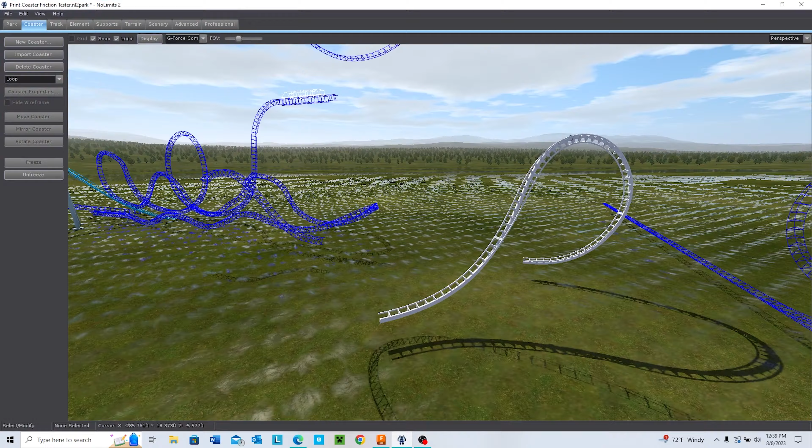Today I'm going to be showing you guys how to export a No Limits track, put it into Fusion 360, and then model track pieces to be 3D printed.

Alright, so going right into it, I have this little dive loop, or Immelmann, model built on No Limits right now. First thing I'm going to do is unfreeze it, just to show off a little shaping and everything.

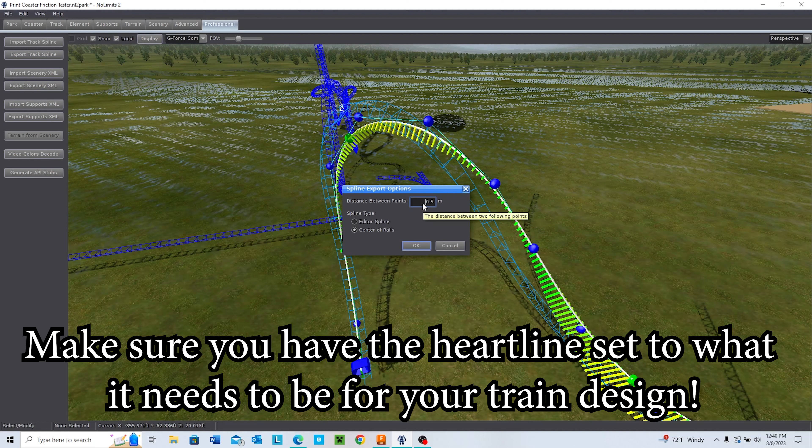Next I'm going to hit Export Track Spline. I like to export my track spline as a center of rails because it's easier to model track this way, and it looks better whenever you put it in Fusion 360. It comes in as 3 different lines, and that's exactly what the track will look like and where the spline, rails, and everything will be. So I like doing it this way.

For the distance between points, I like to do 0.5 meters. This is to model track that is 1/30th scale with a 3-foot distance between the 2 rails. This is just the scale I've chosen to model all my stuff in. Alright, so hit OK.

Then you're going to want to choose where to put your track spline. Make a new folder, just call it YouTube video. And then let's name it - we'll call it Immelmann, or how about dive loop. I don't know if I'll get the spelling right. Hit save, okay, and it should be exported.

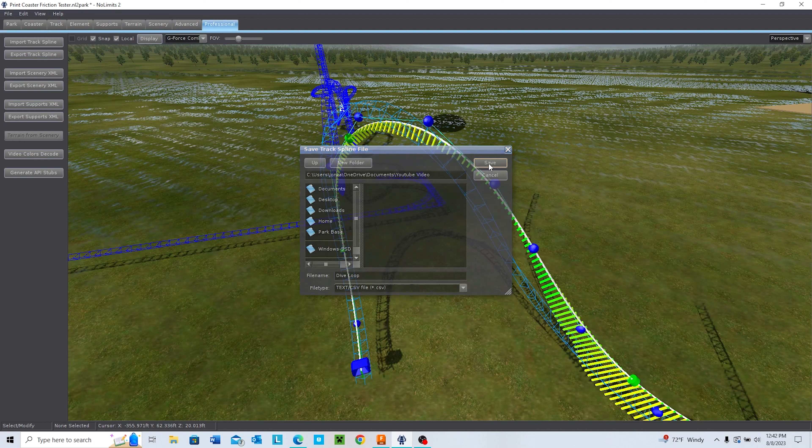The next thing I'm going to do is actually open up the track spline and slice it in a spline track extractor program. I'm going to link this program in the description, but I found it on a Discord - some guy just made it because he was sick of trying to manually do the inputs in Excel.

So pretty much what I just did is I exported a bunch of XYZ points for a single spline that's in the center of the rails. What this program is going to do is help me slice it and give me the rails on either side, along with some other stuff that'll help me model it easier.

So I'm going to open this up, and then we're going to select an input path - find that track export we just did. It goes in YouTube video. There it is, sorry, I was thinking it was in alphabetical order. Then we're going to select an output path and put that in the YouTube video again.

Let's see, where is that? And I'll call this Spline Exports.

Okay, so now we have our input and output folder path set. Next we're going to select the splines to extract. So I want a center, a left rail, a right rail, and then a bottom here. On top of that, we need to adjust the distances to center - this is how far from that center line each rail is going to be.

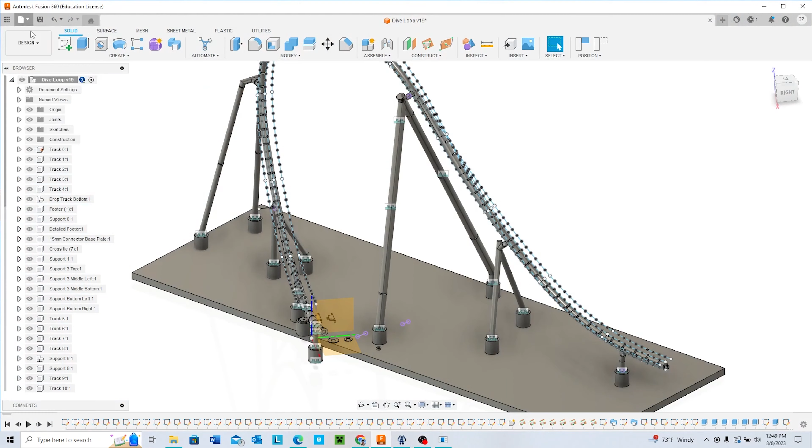So now we're ready to put them into Fusion 360. Here we are at Fusion 360. I'm going to create a new file. First thing I'm going to do is create a new component, and we'll just call it track 0.

Hit OK. We're going to go to Utilities, Add-ins, and then Import Spline CSV. So we're going to go find where we exported all those track pieces, and it will be in YouTube video, Spline exports, here we all are.

So I'm going to import track 0, bottom, center, left, right. Alright, where are they? There they are, so here it is. Here's our Spline exports. And now one thing you might notice is, remember how I said it needs to be

1.2 inches? That's right around 30.48 millimeters. Right now my document setting is in millimeters, and if you measure, it's only 9.144, which is way too small.

However, to fix this, I found the easiest way is if you select all of them, then go to Modify, Scale. Now let's select the origin. Where's the origin? There's the origin. And then we'll multiply it by 3.33333, and that should give us the perfect result we need.

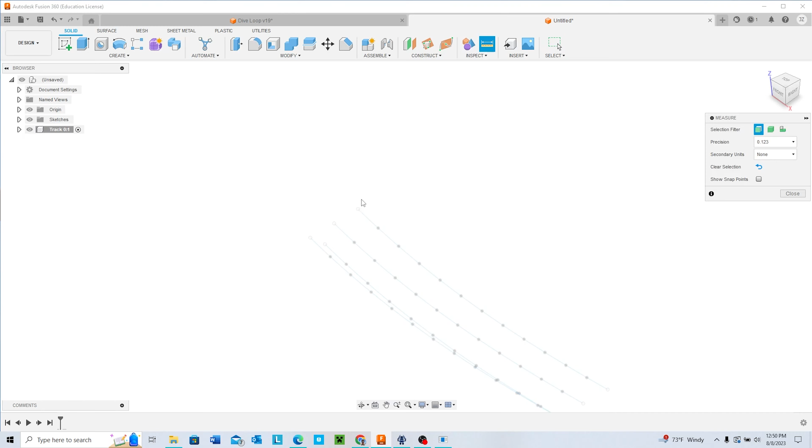So let's double check it now. 15.24, and then like I said, 30.48 is what we're looking for. And there we go, 30.48, exact distance we need. So these are our rails for the coaster, and our spline is down there.

So as you might have figured out, this isn't exactly simple, it's a strange method because you have to scale it twice. You have to scale it once in Fusion, and like I said, the numbers I'm plugging in here seem to be almost random.

Pretty much how I figured out this 4.572 number was I did a ton of trial and error, just measuring the distance between here after I'd scale it, to get that 30.48 distance I was looking for. It was just a ton of trial and error, and eventually I came across this 4.572 number being perfect. Now, if I'm being honest, I can't quite remember - I did this months ago, figured out this number, wrote it down, and was done with it. I kind of forget how I came to this conclusion, other than through a trial and error process.

I forget exactly how this program reads it. I know it has something to do with the way Fusion reads the points when you import them in. I think they read them as centimeters - I could be wrong. I'll put it up on the screen after editing this video to figure out exactly how it's reading them. But this is great if you want to make a 1/30th scale coaster with a 3-foot distance between the two center rails.

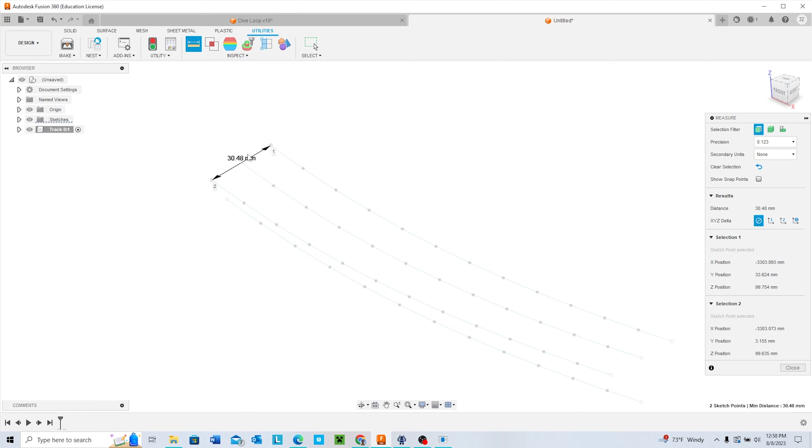Now, if you want to do something different, like a 1/48th scale with a different distance between rails, you'll have to do your own trial and error process with this program. But I will show you guys a way to verify that these splines are actually accurate to the NoLimits data at the end of this video. All right, so anyways, moving on, I'm going to go off camera and export all these track splines so we can have the full loop to model off of.

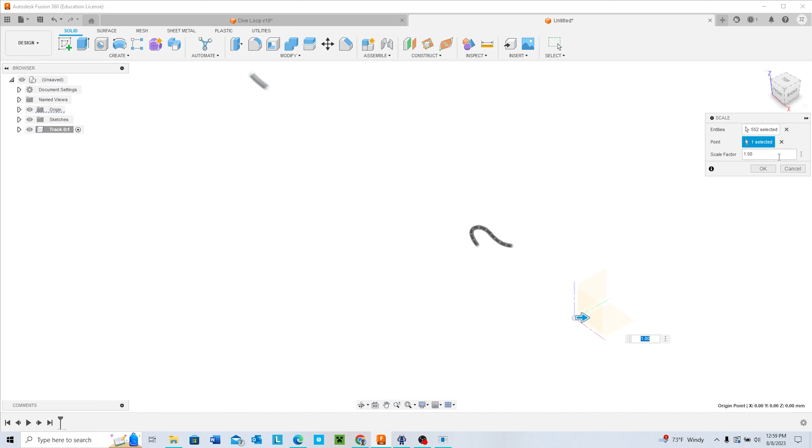Okay, I exported them all in. Now the last thing I have to do is scale them by 3.33333. So let's hit scale, select the origin point. If you select the same origin point for all of them, they'll scale exactly and perfectly. So 3.33333, doesn't quite matter how. And there we go, now we have a nice little dive loop.

Alright, so I'm going to move all these points over towards the origin, or else every time you start a sketch, it'll shoot you back over here, which is not where you want to be, so it can be very annoying. So that looks about right. Now I'm going to hide this origin.

Okay, so now I'm going to show you guys how to create a track piece. And it's pretty simple, because all you want to do is just model the spline and add indents to then insert cross ties into, because if you're 3D printing, it makes the most sense to do it similar to like a Coaster Dynamics roller coaster, where the spline, cross ties and the rails are all separate pieces, so you can get a better degree of accuracy, but also show a method if you just want to 3D print everything as one.

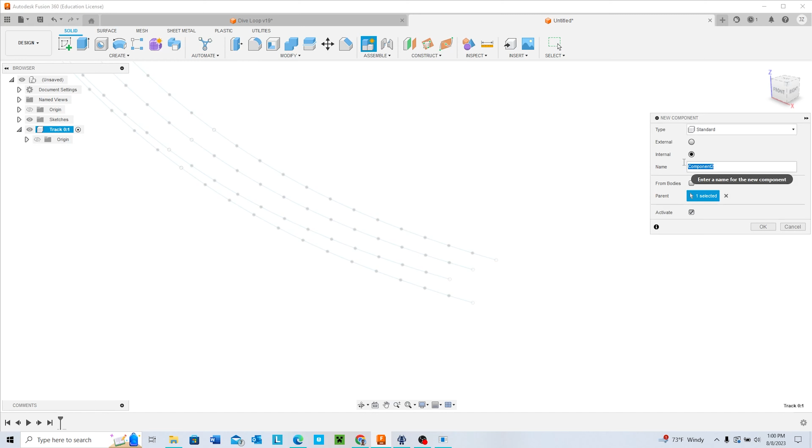So to start, let's create another component within the track itself, and we'll call this just the spline. So there we go, and now we're going to make 3-point planes on all these different points where we want a cross tie to be, and also at the either end of the track. So plane through 3 points, and I'm just going to click on all these points here. So as I said, we'll add in a cross tie position at every 2 using these planes.

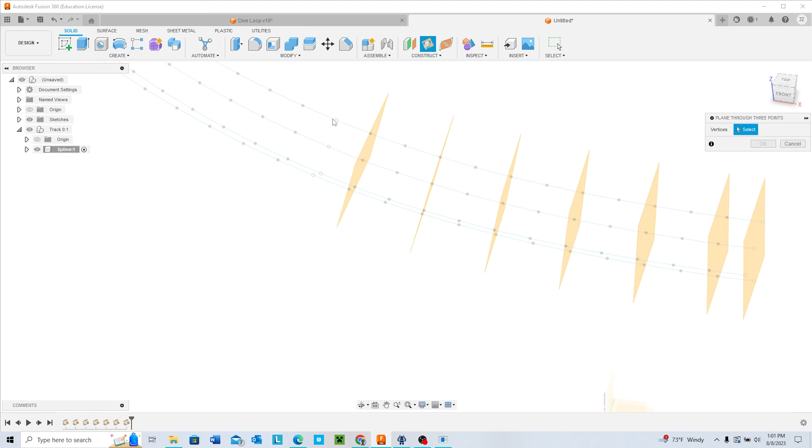Okay. And like I said, one at the end here. Okay, so there we go, we have these planes set up.

So next what we're going to do is we're actually going to create the spline that will be swept. So first thing I'm going to do is I'm going to draw a line, just a random line, and then we'll use these constraints to make sure they're right on the track pieces.

So I'm going to select this one here. Oh, that's great. Let's go back, let's try this again to make sure it's the point, and then we'll have 1 point here, and then right there again.

Perfect. The next thing we're going to do is we're going to drop down where we want the spline position to be. This can be anywhere. I'm used to modeling Vekoma style track, but I'll model B&M to change it up. So let's go 8 millimeters right here.

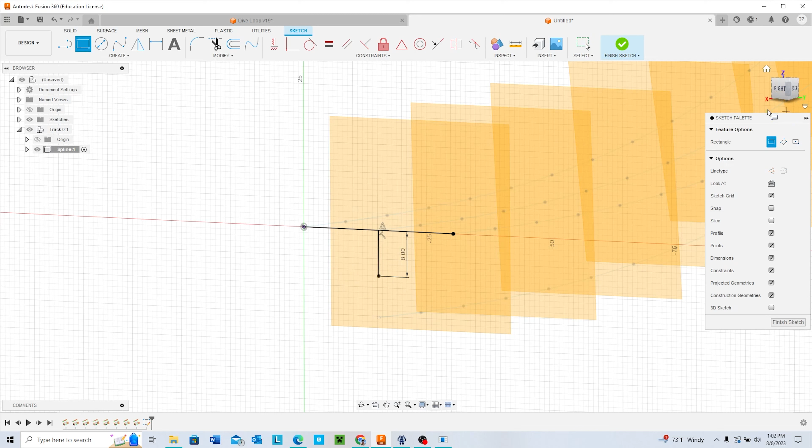And then since they do rectangular stuff, we'll add a rectangle. Let's do, how about 10 by 8? And the last thing is this is vertical. You can't have it vertical because it's not going to be in line with the start here.

So delete that, and then add a constraint. You hold control, you can select 2 different lines at once, and then we'll make a parallel constraint right here. There we go, that's fully defined.

So what I'm going to do is before I finish the sketch, just copy it. It'll make a lot more sense later down. So Control C that bad boy, finish sketch.

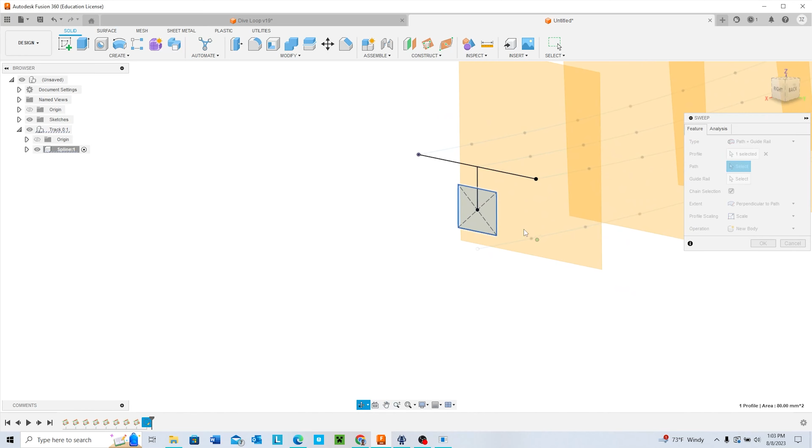Okay, so next we are going to do a sweep. So add this sweep function, and make sure you do path plus guide rail. If you do a single path, it's not going to follow the rails perfectly. So path plus guide rail, here's a profile, make it follow this path down here, and we'll have a guide rail up here. And there we go, there's our sweep.

Now you might think, set it to 1.0, and we'll just be done with it. But you actually don't want to do that, because see how at the end of the plane, this surface isn't parallel with the plane. That can cause issues when you actually attach your track splines together, where they'll be slightly misaligned. I don't think it'll be anything crazy, because this is such a small distance, but if you ever want to do an FEA or something on your model, it'll cause issues.

So what I like to do is have 2 splines, instead of doing 1.0, do 0.51, so right slightly over half.

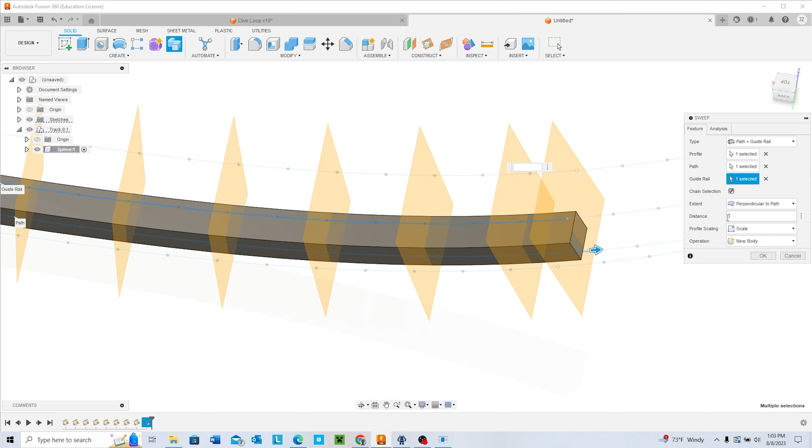And then what I like to do is add another spline on the other side to ensure that each track piece, the faces of each track, will be perfectly parallel with each other. So if you notice, the two lines went away, we need to get those back. We'll open up the sketches and find the ones that disappeared. There we go.

And now we're on this side. Remember how I copied and pasted it? That's why. So let's just put that there. Okay, and then this should be, yeah, none of that's defined, so we should be all right. So select that with this coincident constraint, select where you want it, right there, and then just double check, make sure we're clicking the right thing. Oop, not the line, the point. All right, there we go.

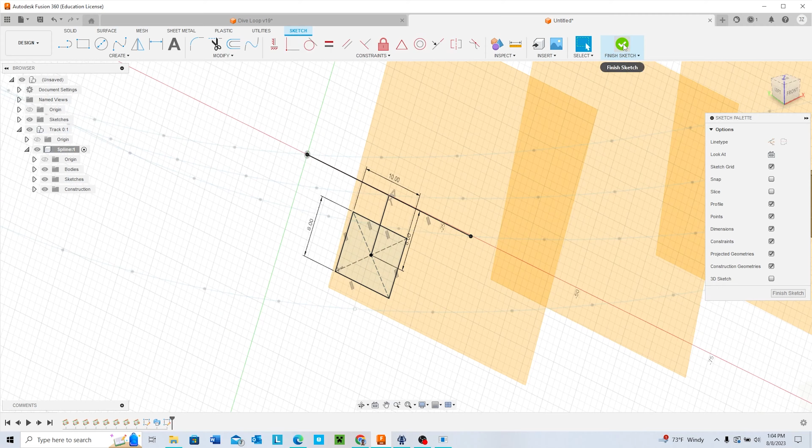Hit finish sketch. Now what we're going to do is sweep it the other way. Bottom as path and guide rail as the top.

Oh, perfect. So sometimes you get this stupid error that says the profile cannot be intersected with the rail. Try changing the profile or rail. I don't know why it does this. I think it's something because it worked fine whenever you did it on the other spline, but sometimes it just doesn't want to work the other way. So sometimes you just adjust the distance and it'll work, but nope.

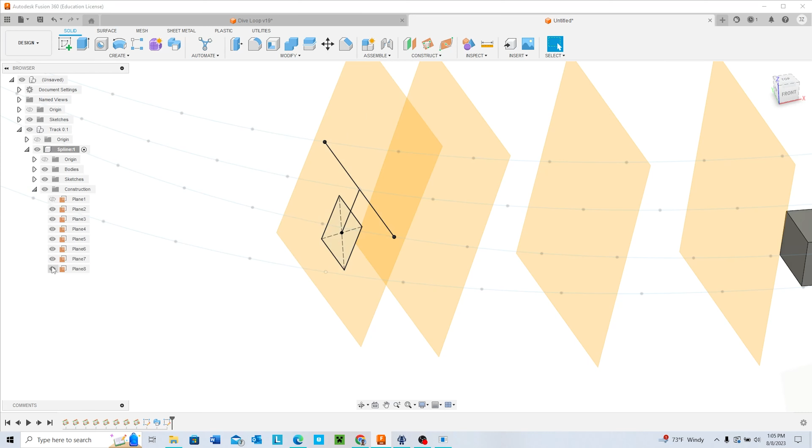Boom, boom, boom, hit OK. And then we need to edit the sketch. And then we'll have it where it goes from here to here.

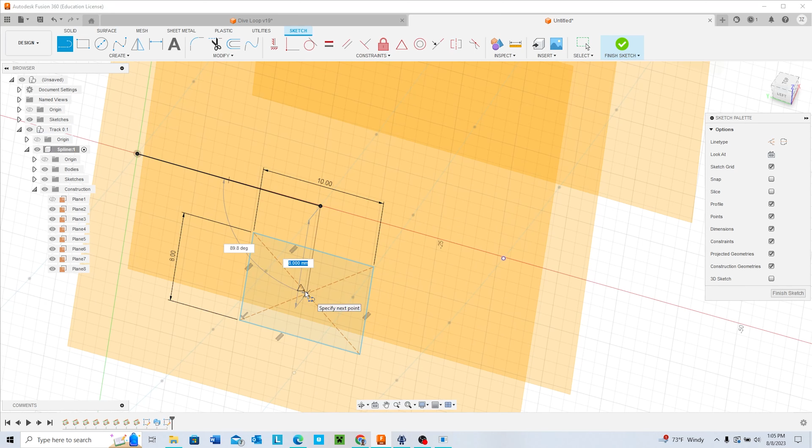If you hold Control, you can select those two points as well. Hit constrain, there we go. And then I believe I made this right around, okay, this is 8 millimeters, 8 millimeters. Double check to make sure this is perpendicular.

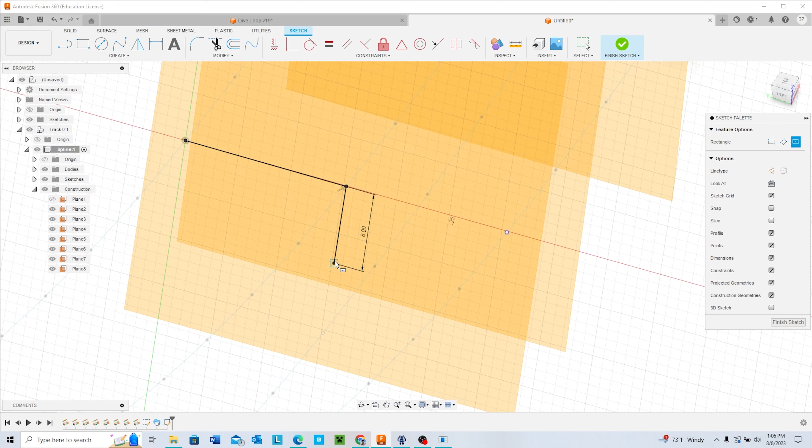And then last thing, for whatever reason this isn't wanting to move, so I'm just going to make a new rectangle. Actually, there we go. Now let's just make a new rectangle. I believe I said 10 by 8. And like I said, get rid of this vertical constraint and just make it parallel. Or I guess you can make it perpendicular to either one of these lines, but I'll do parallel for consistency. Hit finish sketch, and that's how you fix that issue.

You could just make all your planes on these center lines. I don't know, I kind of got in the habit of just setting these three points instead. So if this just happens, I just go through this error. I guess it's really not optimized, but oh well.

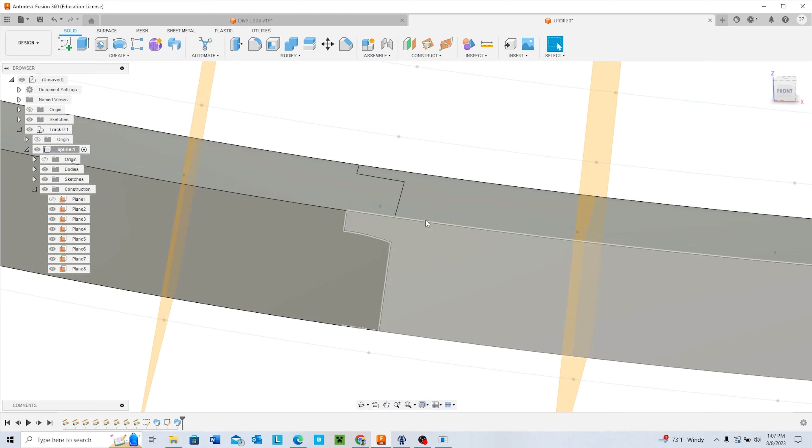And then this time it should work. There we go, perfect. So like I said, do 0.5 to 1 to meet up with that other one, and then set it from cut to join. And there you go. Now you do get sometimes these weird intersections here. I use the Prusa slicer, and I've never had an issue with slicing these, even though it looks kind of ugly, but I like doing this method because it ensures that the two track pieces, whenever they come together, these two planes are perfectly parallel.

Okay, so going into this next, how I like to make these track pieces, as I said, I like to print out the cross ties separately and then just insert them into little inserts on the track. So we need to make these inserts to insert the cross ties essentially. So the next thing I'm going to do is create a poor man's cut, kind of the same method as creating these track splines.

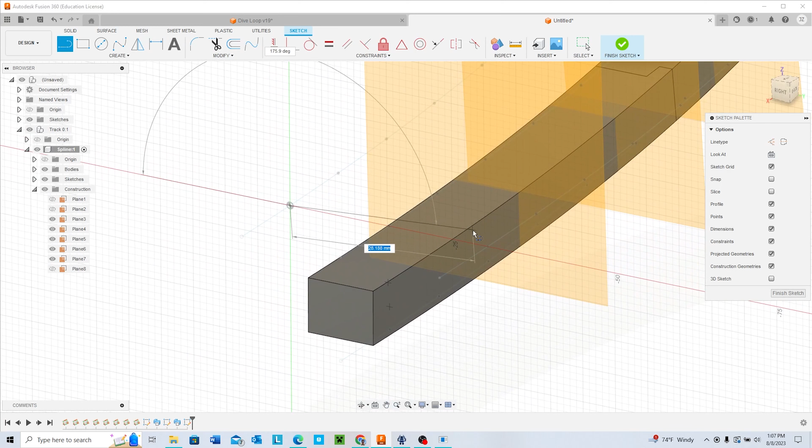So I'll add one starting at this origin, and then we'll make them coincide with this point over here. Make sure you select that point, there you go, perfect. Drop it down from the center line, and let's see, this is at 8, so let's set it so it's again 8 millimeters. The cut stops halfway through the spline. So then from there, we'll have one going out by maybe 12 this way, one going out by 12 this way, or not. Again, Fusion has its issues sometimes. Oops.

And I'll just bring it straight up. Okay, and then we're almost there. The last thing we need to do is add something to center a cross tie whenever we insert it in here. So what I'm going to do is add a little insert tab. We'll do 3.8 down here, or up. Again, I don't understand why Fusion does that, but whatever. It's perpendicular.

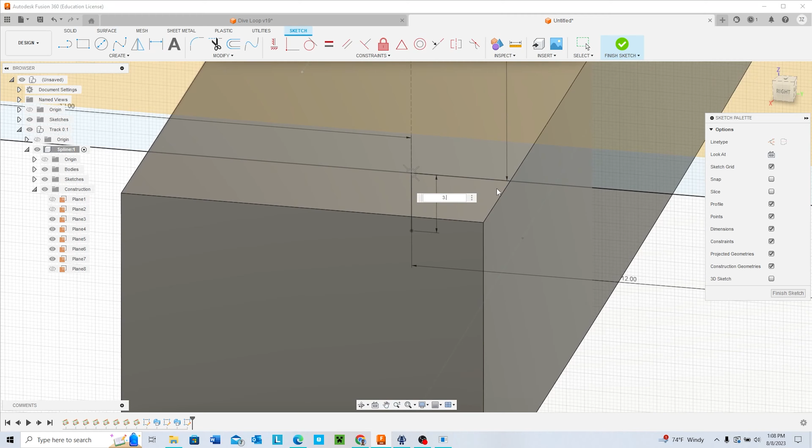3.8 in. Actually, let's go 2.8 in, because that's getting pretty close to the bottom. So again, with Fusion, sometimes it doesn't let you select the dimensions within the bodies, so just hide the bodies, set it to 2.8, and then you can bring them back.

There we go. And then we'll make a 2.8 line over here, 2.8, and then we'll make this midpoint on this line, so midpoint, and then we need to make it perpendicular. There we go, and then one last little thing. Perpendicular to that, and then let's make this just a center line.

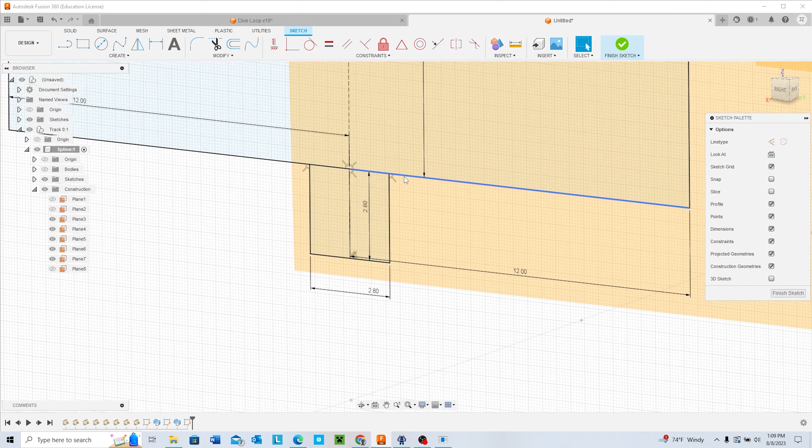This will be slightly annoying, so let's optimize this too by trimming this line out. And then let's add in some... there we go, that should be... why is that? That's a dimension line. Okay, yeah.

There we go, and that should be one face that we can select. Okay, let's bring back the bodies. So again, one last time, before you do anything else, just copy this full sketch and hit Control-C, and we'll use that to copy and paste them onto all these planes.

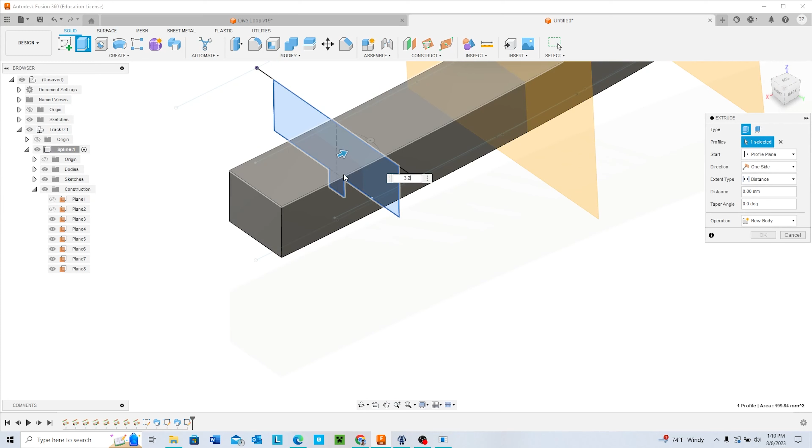So now we finished the sketch. The last thing we gotta do is an extrude. I'm going to set mine to 3.2 millimeters, that's how big I want to extrude. Now make sure you do it symmetrical, and do it the whole length, that way it'll be perfectly centered.

I guess you can just do one side, but I like this way better because it makes it a little bit more even as it's moving through. Okay, so there's a nice spot to put in a cross tie now.

So I'm going to add in, pretty much just copy and paste this, and I'll do it to the next one as well. Now that you have this made, it's really easy. I definitely recommend creating this in a way that allows it to be easily scaled without messing up this whole thing. Like, oh look, right here we have an issue.

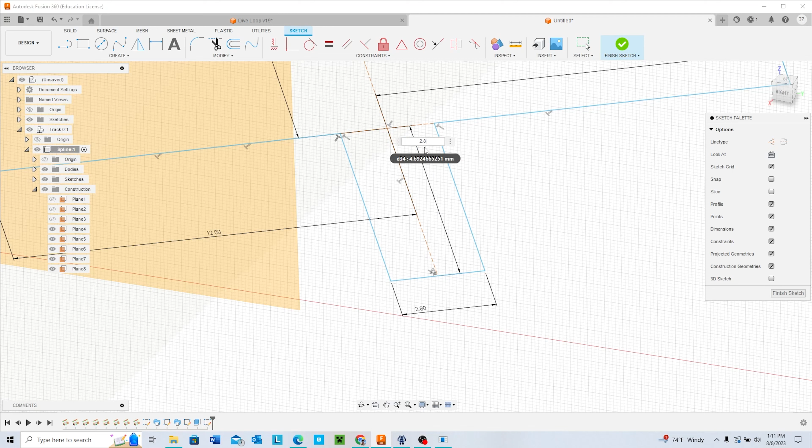This needs to be 2.8. So why is it doing this? Oh, because I think I deleted a sketch. Yeah, I deleted this dimension that was defining this. So again, always double check your work by just messing around with it like I did. So there we go, now that's defined.

And then as long as that's always farther, which it should be, it will be okay. Now let's just select this again. Don't know what's happening there. Let's add in a line twice. So again, good thing I double checked my work. So Control-C, there, now that'll be ready to go.

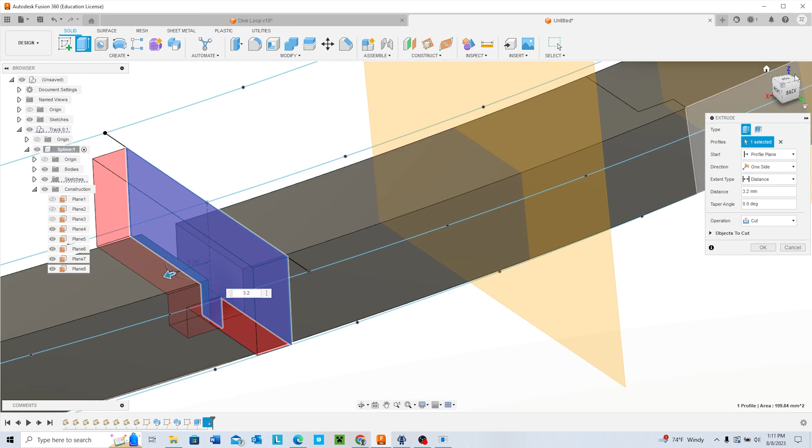Now let's make this coincide with the 2 rail points. So right there, just click it again. It can be kind of sketchy or glitchy, but it usually works no issues. There we go, and the whole length. Okay, so I'm gonna go off camera and add in all these cuts, and then we'll go from there. See you in a second.

One thing I thought of as I was going through here, you might want to consider dimensioning this line here so it stays consistent, so you're not dealing with issues where it goes in and out. I wouldn't do that though, because if you dimension this as 1.2 inches, which is the distance between the 2 lines, Fusion isn't going to like it when you try to make it coincide with these points. So I just leave it undefined, it'll make it a little bit easier in the long run.

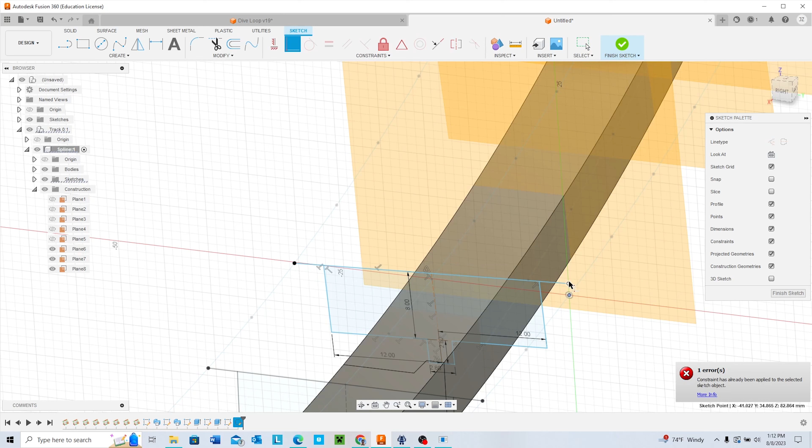Okay, I'm back, and here we have all the inserts for the cross ties done. So the next thing we're going to do is add some tabs on either end so track pieces can be inserted into each other.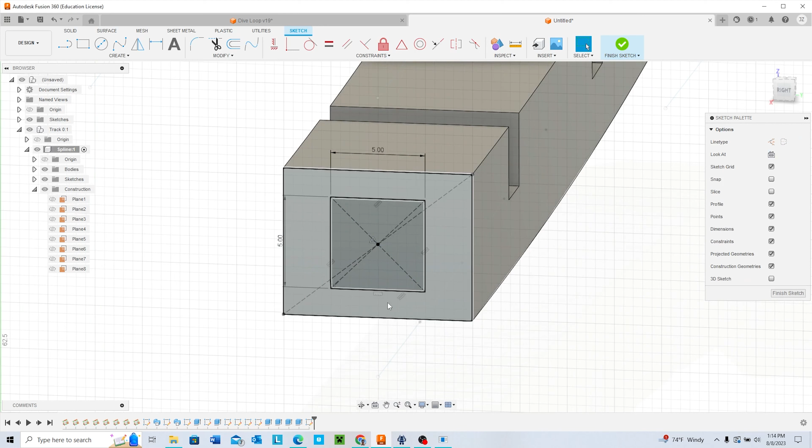So let's create a plane right here. Let's add a line going through the center. Then I'm going to use a square tab, essentially, and this will be an insert tab. So let's make this, how about, let's do 5 by 5 millimeters. And then let's add a parallel constraint up here. Finish that, and let's go in by 6... 7, how about.

Okay, and then on the other end, let's make an insert tab. I guess a male tab, I think they're called.

I set that last one to 5, so let's go with 4.5 for the print constraints. Let's bring this out by 6, because remember, it's being inserted into the track piece. And the last thing is, I like to use M3 screws for all my hardware.

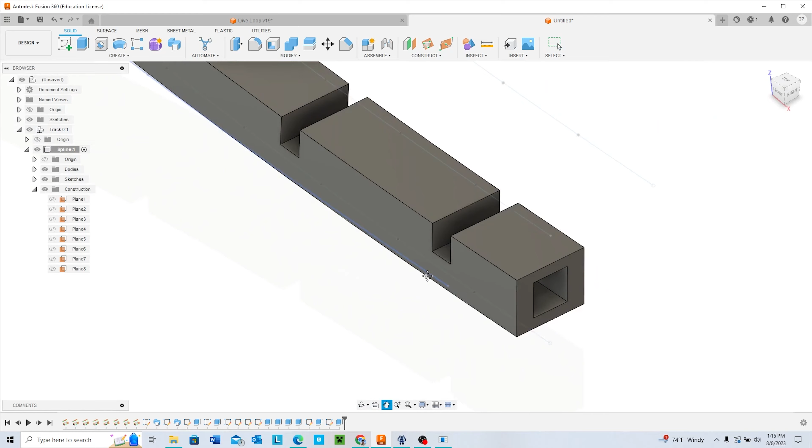So I'm going to add a spot to insert the M3 screws, because if you add a 0.5 millimeter tolerance between here and here, that will create a loose connection whenever you 3D print, at least for my printer. So if you add in that screw, it really tightens it up. I'm adding a 3 millimeter hole for a screw insert.

There we go. And we'll add one on this side too. Make sure you measure 3 out from the face of the track piece, not from out here.

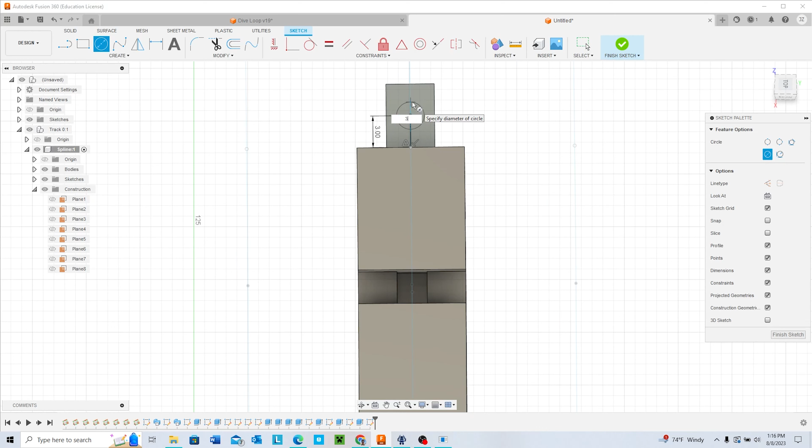Okay, so now you have your first track piece modeled. One thing you might notice is, one, there's no cross ties, and two, there's no supports. So I'm going to go into doing that next. Let's create a cross tie. Go back out of this track and make a new component, call it cross tie.

Make sure you click up here. There we go, new component, cross tie. There we go. All right, let's create a sketch.

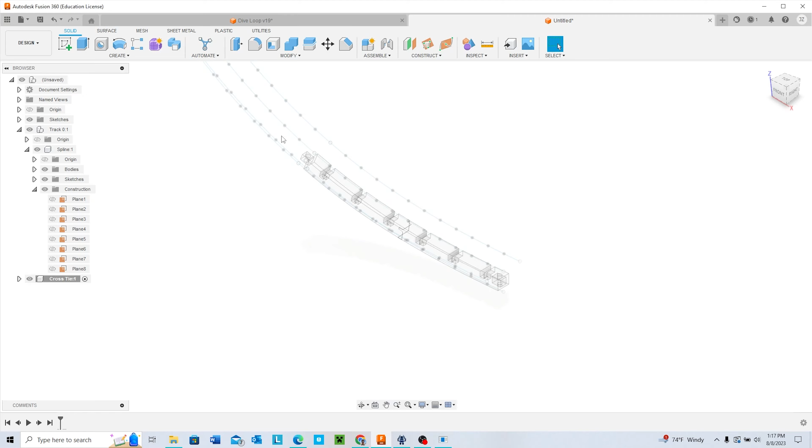As I said, the track, this distance here is 1.2 inches, or 30.48 millimeters. The cool thing with Fusion is you just add in 1.2 IN and it will do the conversion for you. Let's put this on the origin, how about, and then we'll make this flat.

Remember how we did those poor man cuts into it? The distance from this line down to here was 8 millimeters, so let's make a cross tie that fits that perfectly, 8 millimeters. And then the next thing we want, let's add a base. I believe our track pieces are 10 millimeters across, yes, so make this 10.

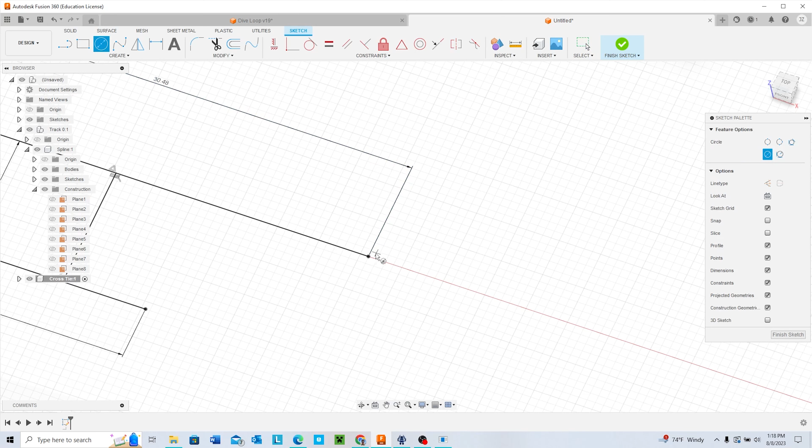As I said, I use tubing on all my track pieces, similar to K'Nex. I usually just buy brake tubing, then I have a 3D jig that'll cut into 2 slots to put in the rails. I use 4 millimeter outer dimension rails on mine, so I'm just going to model it as if it was that. There's the rail on this side, rail on this side, and the inner dimension for those rails is 2.5 millimeters. So we'll set them to 2.4, how about, and again over here, 2.4.

And then from there, let's add a crossbar, another one here. Notice how I'm making them purposely wonky so I know that these constraints I'm about to add are working properly. There's one constraint, there's 2 constraints. And then let's give this a thickness of, how about, 2 millimeters. Oh, or it's just going to fail to solve.

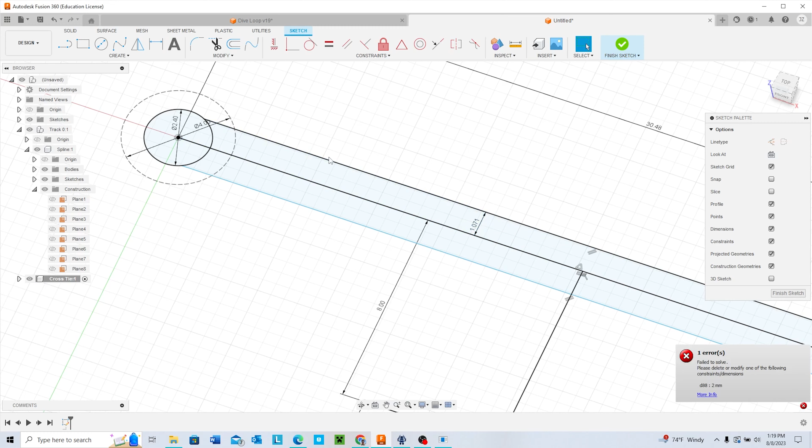Okay, let's just delete this line. Let's see if this one's on right. Yeah, that one's fine. Oh, I think I was setting it to be 2, I should have been putting it as 1. Oh well.

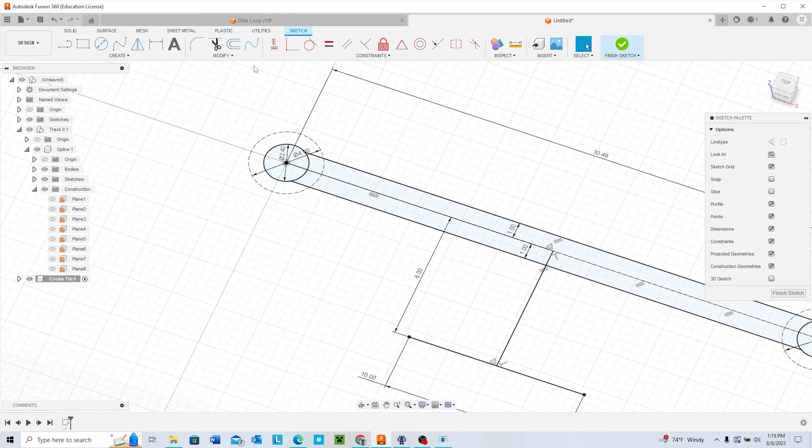Okay, let's make this a construction line to make it a little bit easier. Now, in order to ensure that the rails hug the circle a little bit more, because I want to have a smaller slot whenever I cut them out, this 2 millimeter thing here seems to be a bit too big, so let's make it 1 millimeter right there. At least in my experience, I've never had issues with this being too thin.

The cross ties are pretty strong, surprisingly, but it depends on the printer really. I have a Prusa Mini that is really good at printing out all these small little pieces. So I think if you have one of those, you shouldn't have too many issues, but again, it kind of depends on the printer. This is just how I do it, as I said.

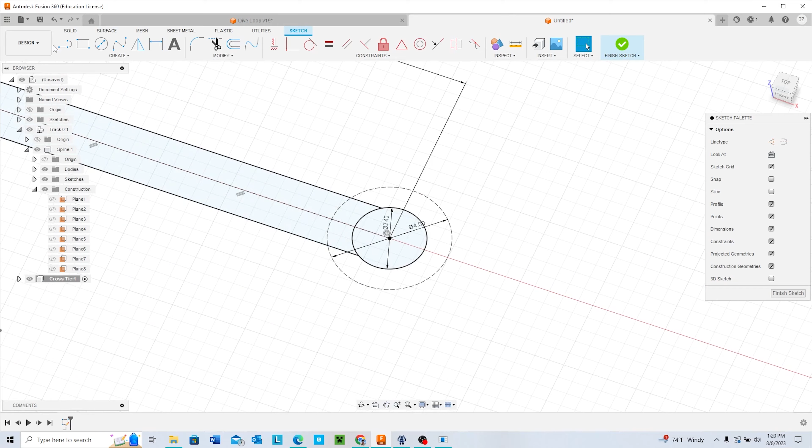And let's give this 1.5. How about, there we go, 0.5. There we go, that'll ensure we have a smaller cut so it really hugs the center rail. And then let's do it on the other end. Okay, there you go, that's about good.

And then the last thing, or no, 2 more things. Remember how I set that tab to be 2.8? Let's set this to be 2.4... 2.6, how about, slightly smaller so it can insert easily. Okay, that tab's done.

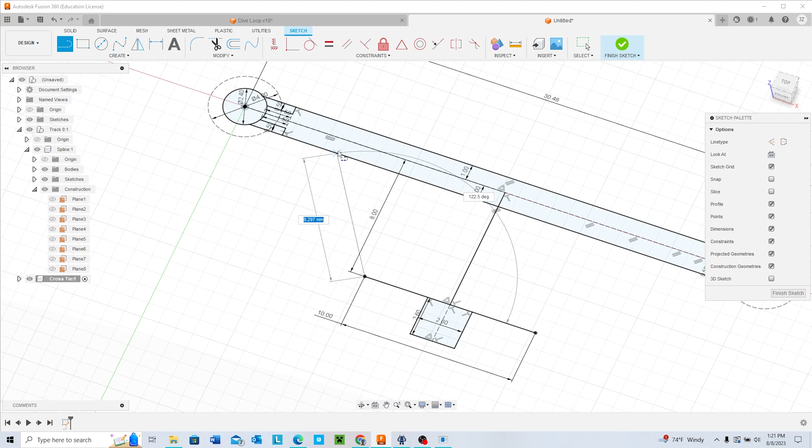And then for the up spot, this is where you want to put this in position relative to the rail, it's really going to depend on your train design. I'm sure the inner side of your bogie will be a lot further in, so this just comes down to how you want to design your cross ties. But let's just do 120 degrees.

Yeah, that'll be enough. Okay, hit finish sketch. And then next thing you're going to do is just extrude everything.

So we set this gap here to be 3.2 millimeters. So let's make this 3 millimeters. These tolerances I'm setting are just based off of how my printer prints, a lot of trial and error. You guys might have to set your tolerances differently, just depends.

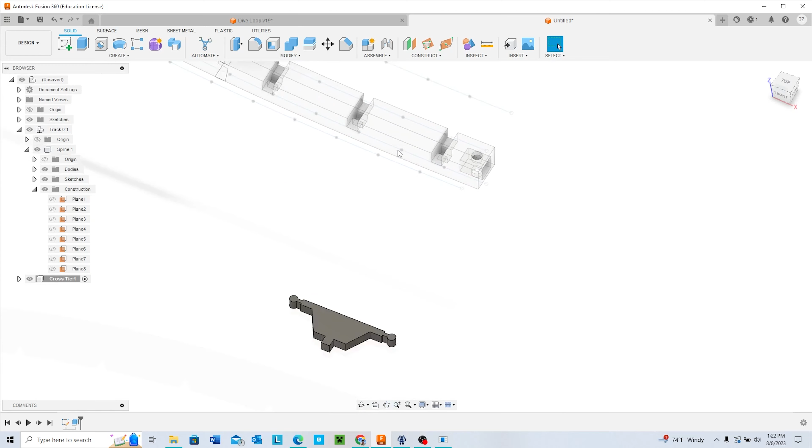Okay, so there, now we have a cross tie put in. Now let's double check to make sure they're going to put the rails exactly where we want them. So let's joint these 2 components now.

Put one on the bottom, put the other one right here. Turn at 90 degrees, and then I believe this is 0.2 tolerance we added on here. Yeah, there we go.

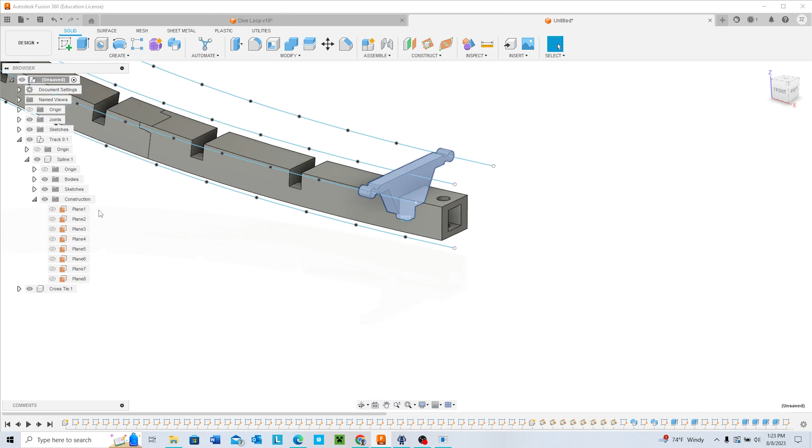Now, if you really want to get detailed with your model, you can always copy and paste these cross ties. So hit Control C and then paste as new. It'll paste as a new component if you really want to put them in, but I don't see the point to it. Especially since this is mainly just to double check.

Because at the end of the day, you're gonna want to print these separately, and if you're building it like a K'NEX coaster, you're gonna want to print these separately too, so it doesn't really matter if they're in the model or not. But let's say you want to print these track pieces as just one piece. I'm going to show you how to make that now, going through a couple different options for you.

So let's copy and paste this cross tie. Copy. And then I'm actually going to remove this joint. So again, hide the bodies, hide both bodies I guess. Delete. And then let's bring them back.

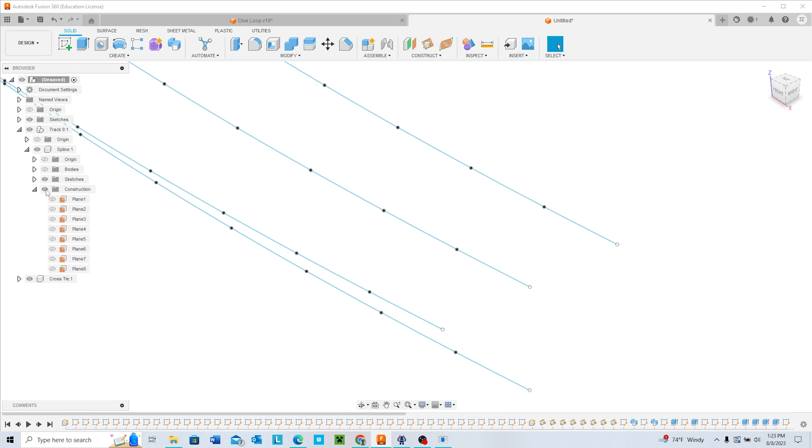So in order to make it easily printable as just one solid track piece in Fusion, there are two things you can do. Either A, whenever you're building the spline, instead of making these cuts, you can pretty much model the cross tie right here in the sketch, and then hit join, so just put them in like that. Or, if you've already been following along and you want to make this just one solid track piece with the cross ties printed with the spline, then what you're going to want to do is pretty much copy this cross tie you made down here, then go into the spline, and then hit paste as new.

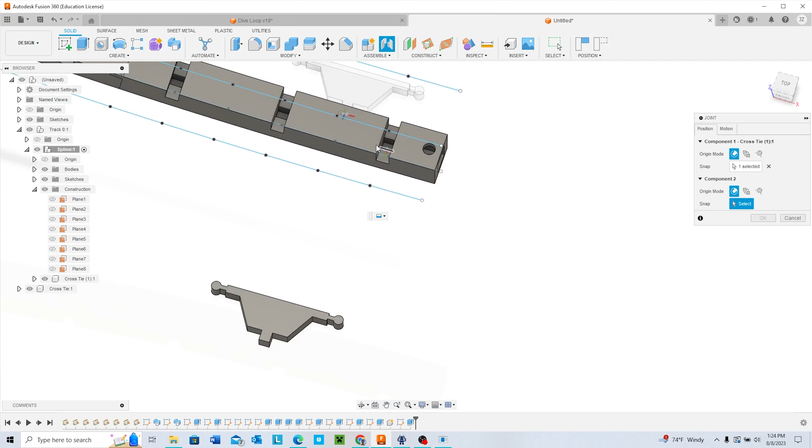And then we add a joint here and here. Same thing, and then bring it up by 0.2 for that tolerance we added.

And then now, whenever you go to the 3D print and just hit spline, you'll see that it's selecting this cross tie all as one piece, so it'll be printed out as one piece on your exporter. So that's if you want to do it that way. Then you pretty much just copy and paste over my cross ties, add the joint, put them in, and that's that. But that's going to take forever. I just want to show you guys that's an option you also have, but I'm going to stick with the way I know, which is printing everything out separately.

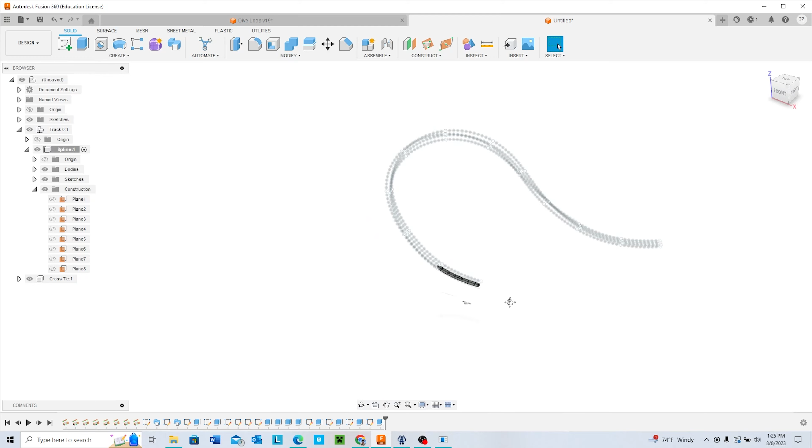So the last thing I'm going to do is show you guys how to make the supports on these track pieces, because it can be a bit confusing at times. So to start off these supports, the first thing I like to do is drop in a plane, so hit offset plane. I usually try and drop it towards the center. Usually doesn't look like there's a good center, so let's put it right on this cross tie here.

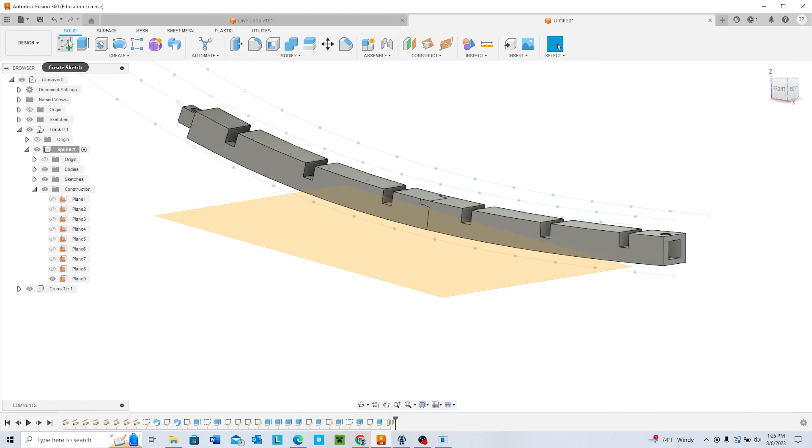Let's drop it down, how about 8 millimeters? Yeah, 8 millimeters down. Hit OK. And then what I'm going to do first is start a sketch on this plane right here. This is inside the insert. I'm going to draw a line connecting this wall to this wall so it's centered. Oh, what's happening?

Oh, actually I'm sorry, I'm in the wrong insert, I think. Yeah, I'm in this one. There we go, there we go.

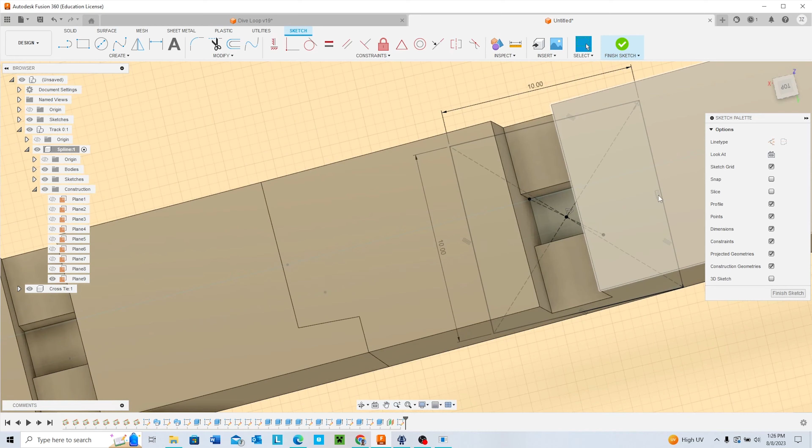Let's make a box here, 10 by 10 because that's the width. Last thing, we need to find that parallel constraint. There it is, hide this body. Select this constraint right here, delete that, bring back the body. Let's add a parallel constraint between here and here. How about hit finish sketch?

On this plane we drop down. Let's say we're going with a circular support kind of shape, so let's add in a circular support. I just drew it directly on the center line of that thing, on the square. There we go. Now let's do a loft.

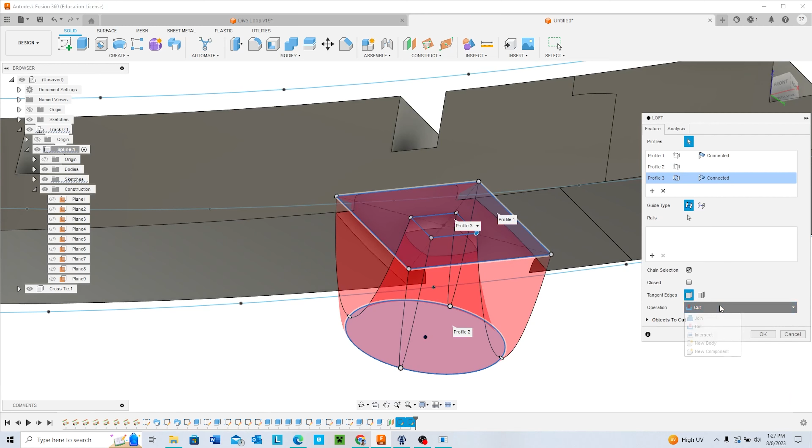Alright, again we need to hide the bodies. Select that one, make sure you have that too. Bring back the bodies. Oh, that looks like garbage. Okay, I think I know what happened - I think it's the order I selected stuff. Let's try that again. Loft.

And connect it to that one. Select the bodies, there we go. And change that to join. And there we go, now we have a nice little connector.

So then from there, we need to create a component that's just the supports. Let's add new component. Make sure you select the whole thing if you want to add it on this big timeline. New component, support.

Okay, so let's choose where we want to make this first plane. I think let's have it right here. Let's have it offset a plane here. Let's say we're building a ground to be 20 millimeters up. Let's say this plane here - this is the ground that everything's going to be based off of.

So what we're going to do first is create a plane between a 3-point plane. Let's select this point here, this point down here, that's going to drop it in. It doesn't matter where we select our next point because we just want to draw a line that's normal to this face going straight down. So right there, yeah, that works.

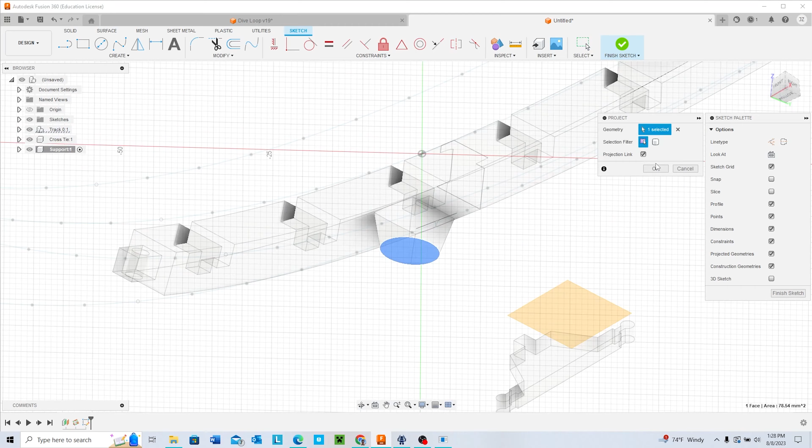Let's start the support. And then what we're going to do is project this here, so hit P for project. Let's select that face. Let's try that again, P for project. Hit OK. Why is it not coming in?

Okay, changing it. Let's add a line that goes normal to this face. So if we draw a line from here to this point here, hit coincident. And then we could just draw another line straight down. Let's make this 16, how about?

All right. What we're going to do is pretty much just make a wireframe of all these supports.

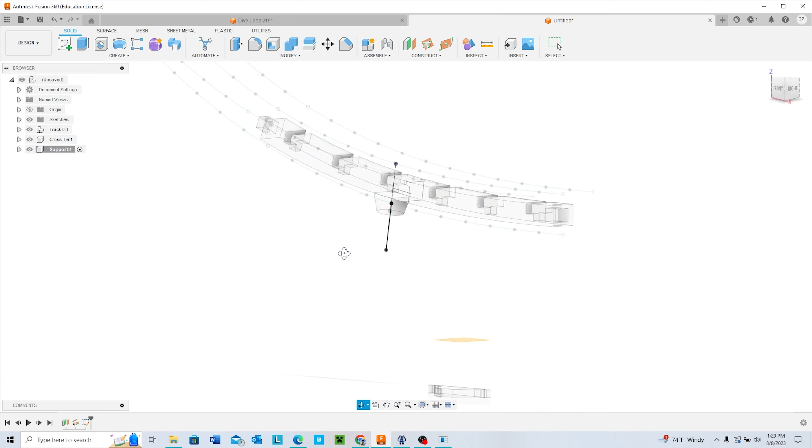Okay, so now what we're going to do is we're going to add a projection. So we drew this line that's normal to it going straight down. Hit finish sketch, and we're pretty much just going to create a wireframe of what we want the support to look like. So let's say we want to add a point that goes from here directly straight down and then one over. So we need to pretty much draw a plane that's perpendicular to this that goes from this point straight down.

So to make sure this point is perfectly vertical, what we're going to need to do is hit create sketch. Let's create a sketch right here. And then what we're going to want to do is project this line down, so hit project, hit OK. There we go. And then we'll add a line that's, let's make it perfectly perpendicular to here. Doesn't matter how far out you go.

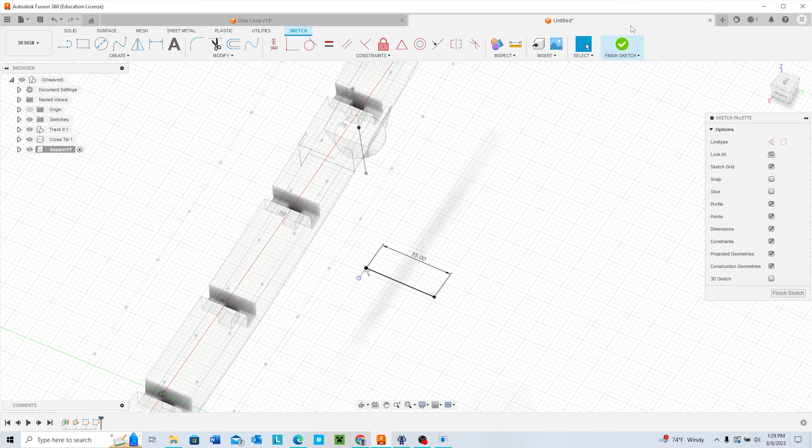15, finish sketch. Now I'll do construction through 3 points. Let's put one through this point, and this point. And then there's something we can draw our wireframe on.

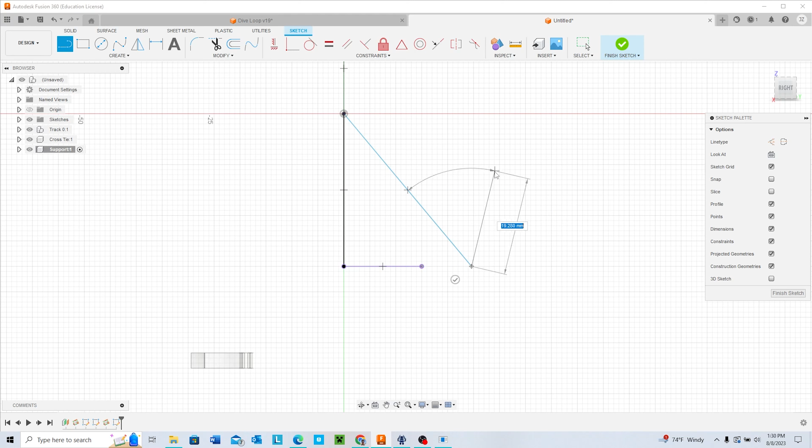So next hit create sketch. We'll make this track perfectly vertical going straight to this line here. And then we'll make this, how about, that looks about right. Make sure these two are horizontal, and we'll add a degree angle in here. Let's make this 40 degrees. Perfect.

Okay, so now what we're going to do is we need a little bit of a straight bit going down here. So we'll make this 2 millimeters down, and then another 2 millimeters down this. There we go, that's so whenever we connect them to the footers, this will be straight. So hit finish sketch. What we're going to do next is add a sketch like that - we're going to make a sketch right here.

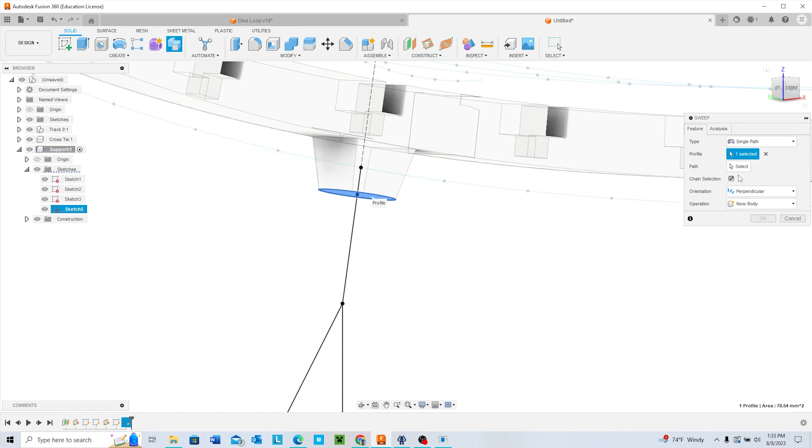Let's make a 10 millimeter support base. Finish sketch, and then let's sweep it. It's a single path because it's a circle. Let's make the first path go from here to here, and down one more. Oh, it's following that already. Perfect, now it's clipping up into the track piece. We don't need this, so just remove that.

Hit OK, then the next part is we'll make another sketch. Let's start it. How about we start it right down here instead. So do plane along path, bring this down all the way to the bottom. Hit OK, and as I said before, let's make it 10 millimeters, keep it consistent. Hit 10.

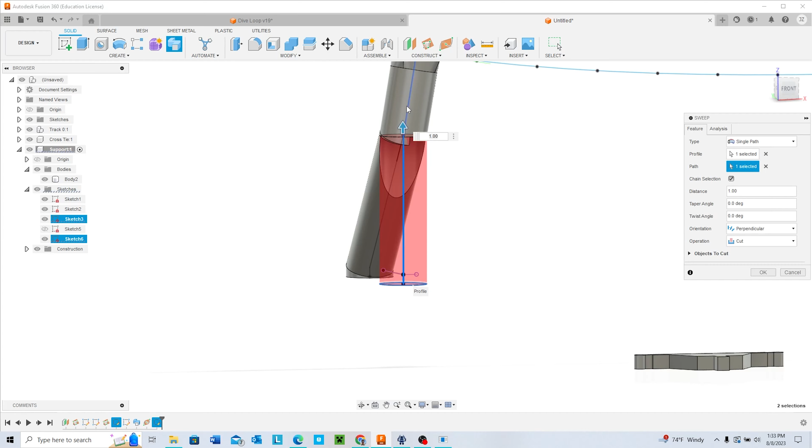Hit finish sketch. Now, since this is a vertical line, you can use the extrude function, but it'll get a little wonky here, so I'd recommend sticking with the sweep. Pick a path, we'll have it go straight up there, and if we want to make it fancy, we can try and flip it up, hit join, and then make sure it doesn't flip through.

Okay, so that's how to make a support. Very basic, crude, it's not very pretty, I know. Usually, if you spend a little more time with this, you can really make these supports look a lot better. This is too long, I can just tell by looking at it. But I just kind of want to show how you can use the projections to really get these perfectly vertical.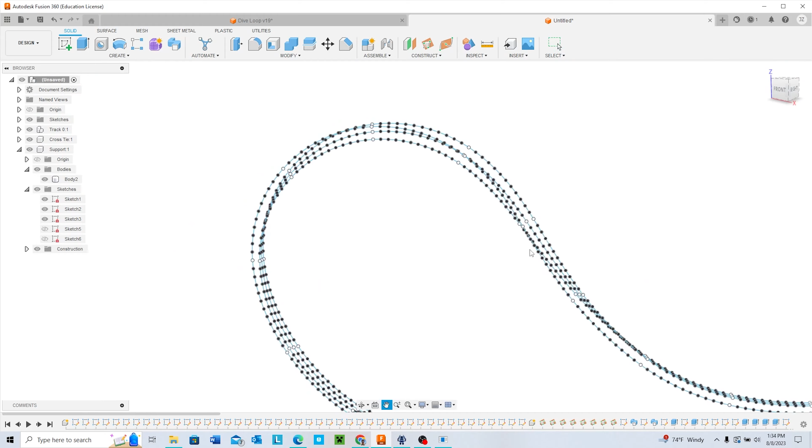So what I'm going to do off camera is I'm going to make all these track pieces. But what I'm really going to do is, since I've made this into a model already, this big loop, I'm just going to change my tab and look at that. I somehow magically modeled everything, and I went from a B&M style to a Vekoma style.

I guess I'll go into some of the details I add. So you might notice that there's a gap between all the supports. This is so I can separately print out a flange piece that looks like it's connecting the track pieces. So there we go, these parts here, they pretty much fit right. I can fit two of them, one here facing down, the other one facing up on all the track parts, so it makes it look like they're actually being bolted together. It's a little added detail.

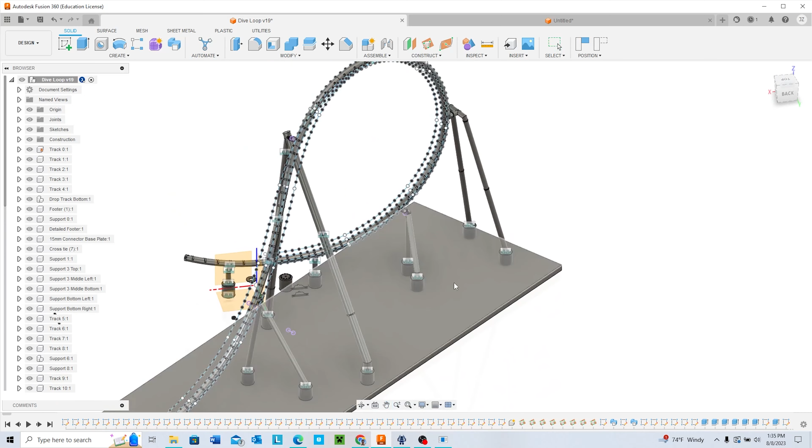And then this is the baseboard I actually connected everything to that I then printed out. So yeah, this is pretty much how I model all my track pieces in Fusion 360, and then that model can then be printed. And the last thing I want to show you guys is a verification way to verify that what you created here is exact to the no limits model.

All right, so to do that, we're going to go back into no limits. Or actually, no, we don't need to go in no limits, we need to go back into the extraction program. So make sure, like I said, 4.572 if you're doing the 1/30th scale. And instead of doing split type, split after X nodes, just hit don't split. Let's change our output real quick too, so we don't get confused with the other outputs that are all the individual track spline pieces.

So let's find YouTube video, and then let's hit new folder. We'll call this just single spline. And this is what we're going to do, make an export that is solely just one set of points. So I believe that's going in the right spot now, we'll double check it. Yep, single spline, hit OK. And then let's just hit calculate. And there we go, now we just have one single track piece.

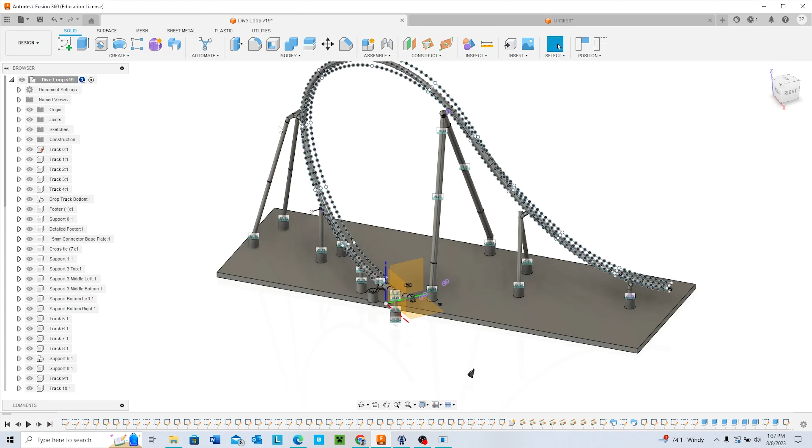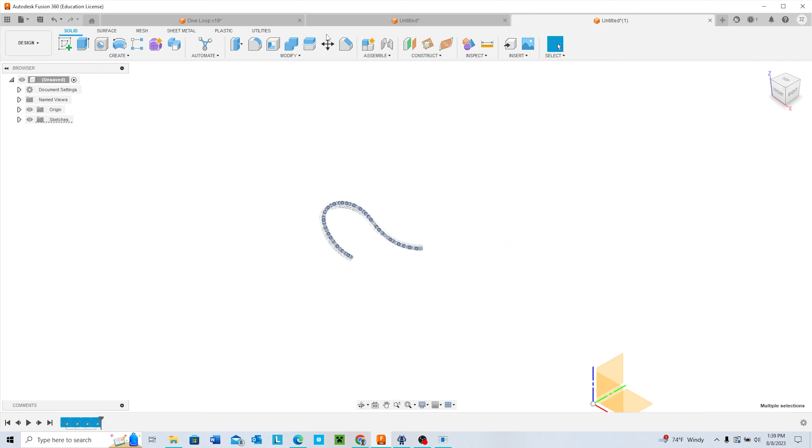So what we're going to do next is let's create a new file. And then we're going to go to utilities and let's add in that single spline. Okay, there it is, let's scale it by 3.333. Okay, there it is. Oh, let's bring this over a little more. Okay, let's double check, make sure these distances are correct.

.48, perfect. So now what we're going to do is we're going to add a plane right at the end here, a plane along path. 3-point plane, right there, there, and there. And then what we're going to do is hit create sketch, and let's just create just the rails.

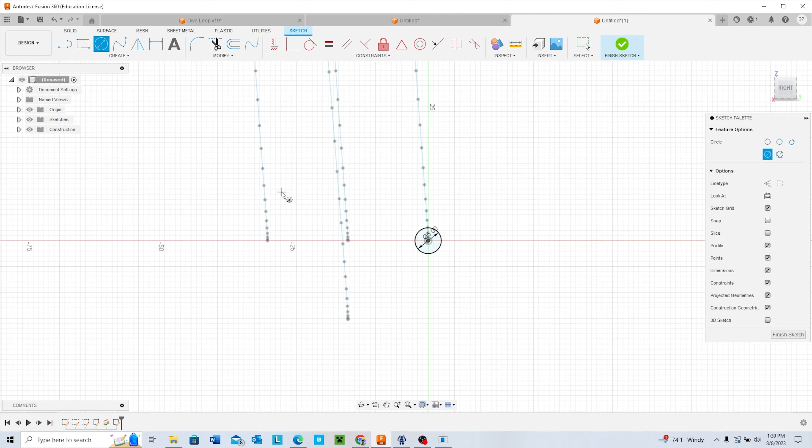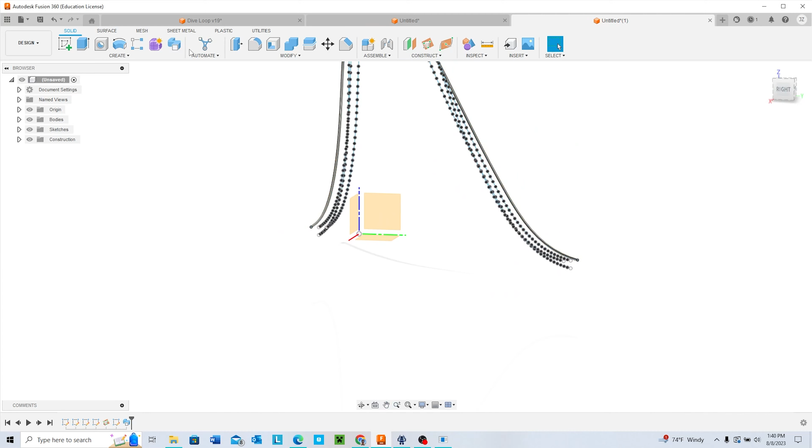Hit OK, hit finish sketch. Now let's do a sweep. I guess we can do single path since they're just circles. Let's make it follow this rail first. There we go, single path. Now we have 2 rails to work with.

Now what we're going to do is take this model and create a scenery piece that we can put into No Limits and verify that it follows this track perfectly. To get stuff into No Limits, we need to use SketchUp. If you don't have it, you can get a free 30-day trial if you say you're a student. If not, it's $60 a year, which I'd recommend if you're into No Limits—it's really useful for making your own scenery objects.

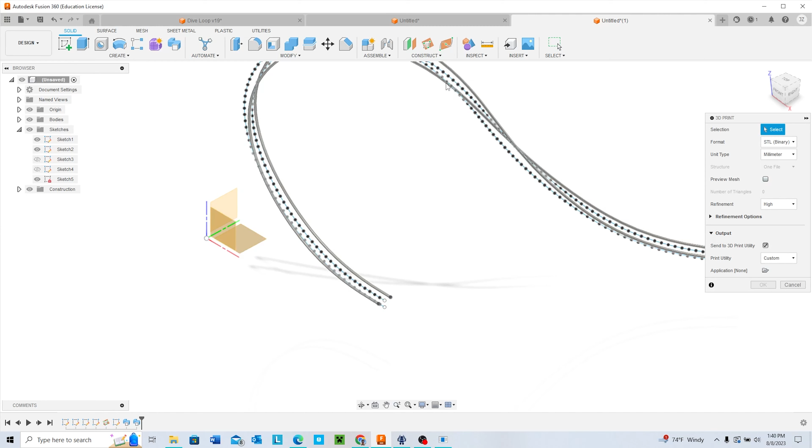Let's go to export, change that to SketchUp file, and hit export. We need to make sure it goes in the right spot—let's put it in the YouTube video folder, save, and hit export. It needs to process through the cloud, so this will take a little bit. Once it's finished, I'll be right back.

Okay, this is complete. Close, and now let's open up SketchUp. Hit open file, it should be in the YouTube video folder. There it is. So there it is in SketchUp—a nice little dive loop.

So you don't have to do anything, though you can change the colors if you want—I don't see the point. Go ahead and export again as a 3D model. Now it's going to export as a DAE file, so let's put it directly into that park folder we were working on. Where is it? It's print coaster something. There we go, export.

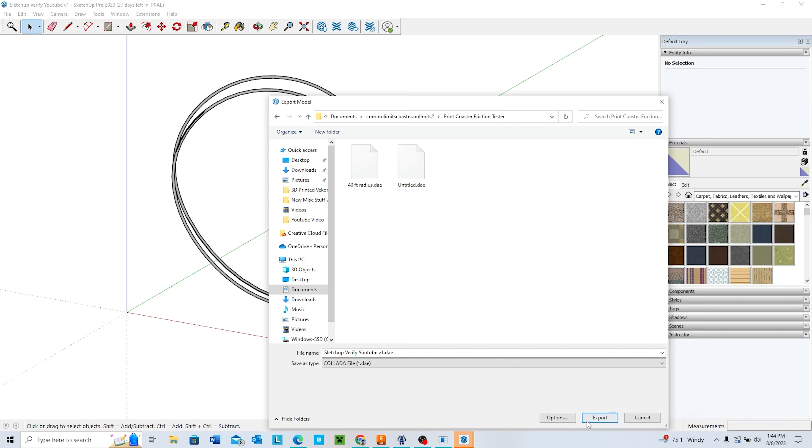Now it's exported, let's open it up in No Limits. Go ahead, hit scenery, it should be under DAE—SketchUp, verify YouTube. Just hit OK, and let's add in the object.

Now this is in millimeters. Remember how I said this is 1/30th scale? So if we scale this by 30, it should exactly align up with the roller coaster—30, 30, 30. Now let's just drag it over and see how well it lines up.

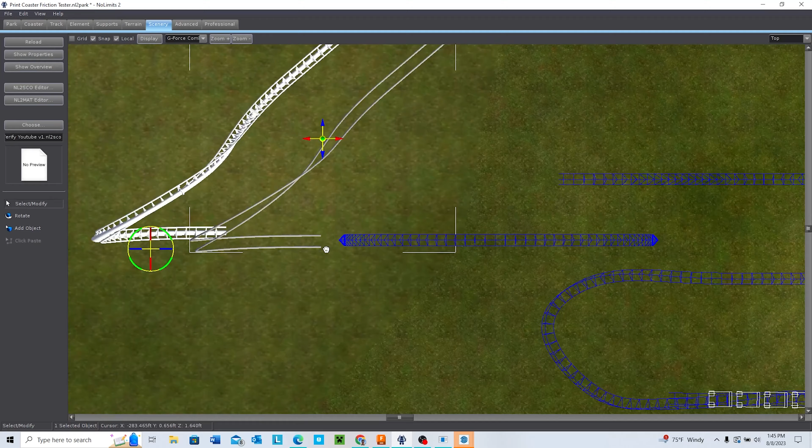As you can see, it's almost a perfect match. Let's turn off the snap—oh, it's too high, that's why. I have a lot of stuff being built right now in this park model. There we go, alright let's see. As you can see, it lines up with the track almost perfectly. So I'd say this is a success—it's an exact replica of what we want from No Limits.

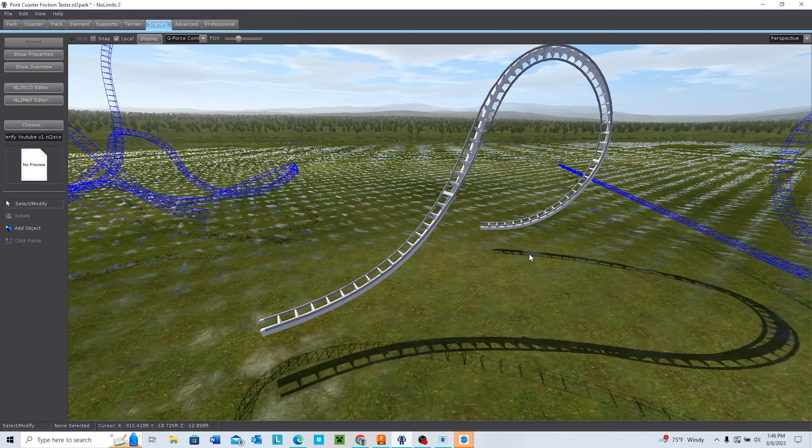And now we can have it built in Fusion 360, which can then be printed as a model. So that's pretty much it for the video.

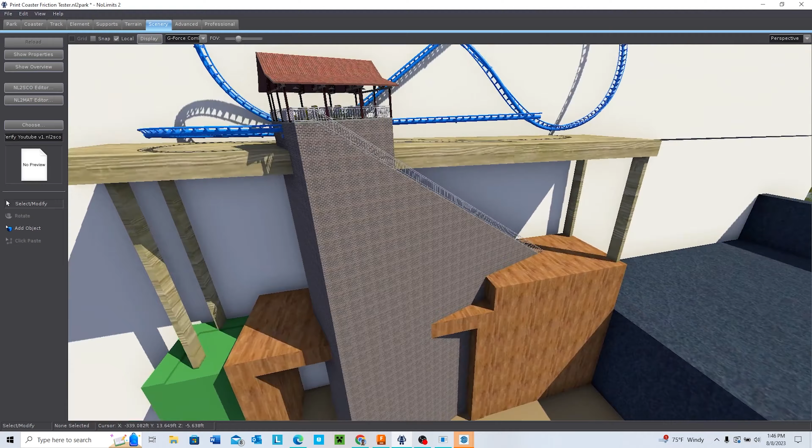Anyways, moving on, some of this stuff I've been working on—this is all my 3D printed stuff. I've been working on a 3D printed coaster for the past year, and I'm at a point where I finished the train assemblies and I'm building something to put on a shelf in my apartment bedroom. Here's a little mock-up of my bedroom right now with the coaster on it. Hopefully I'll be making a video soon explaining everything I've done with that process.

Because I'm not going to lie, making the track for a model coaster—what I just showed you guys—that's the easy part. The hard part is making up your own train design that runs as efficiently as you want it to. At least for me, because I went with a design similar to what No Limits' Intamin Blitz model uses, which has a lot of moving parts. So I guess maybe I shot myself in the foot with that one. But hey, it's fun and it's working now too.

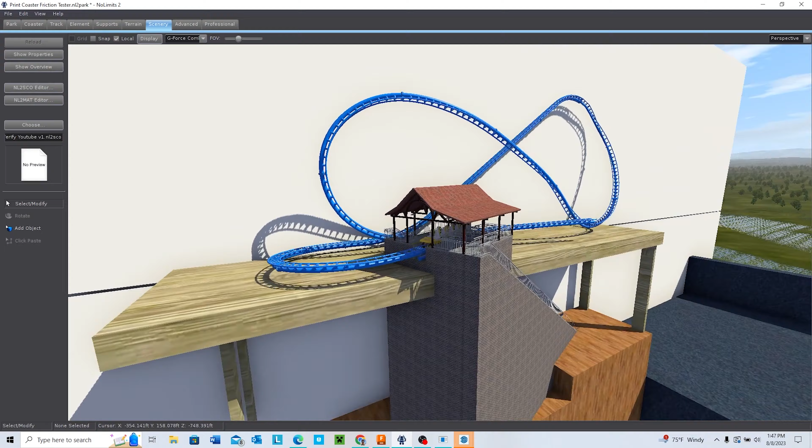So besides that, I guess I'll finish off with some cinematics of the actual model I printed out of this loop. Other than that, have a great day and hopefully this helped. Bye.